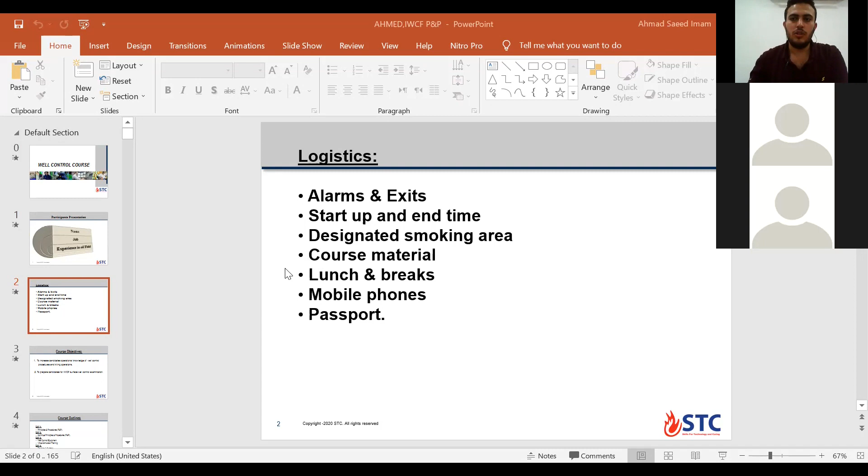After that, we're gonna talk about course objectives. We have two things. First is to increase candidates' operational knowledge of well control procedures and killing operations. During this course we're gonna face key topics and key definitions.

So we're gonna talk about the kick type, and blowout, if we didn't control and manage the situation. So we're gonna face something called a blowout. Then the type of barrier, something to prevent the kick and the influx from reaching the surface and entering the well. So we're gonna talk about barriers and barrier classification, how to pressure test these barriers, how to check that these barriers are able to prevent formation fluid from entering the well and reaching the surface.

Then we're gonna talk about key pressure definitions, like hydrostatic pressure, formation pressure, and what causes formation pressure to become abnormal. We have many causes.

Then we're gonna talk about kick warning signs. How can you detect a kick? We have some signs - if you find any of them, it's a warning sign that you have a kick. Then after that, we're gonna talk about pump pressure and its relation with mud weight change and its relation with pump speed change.

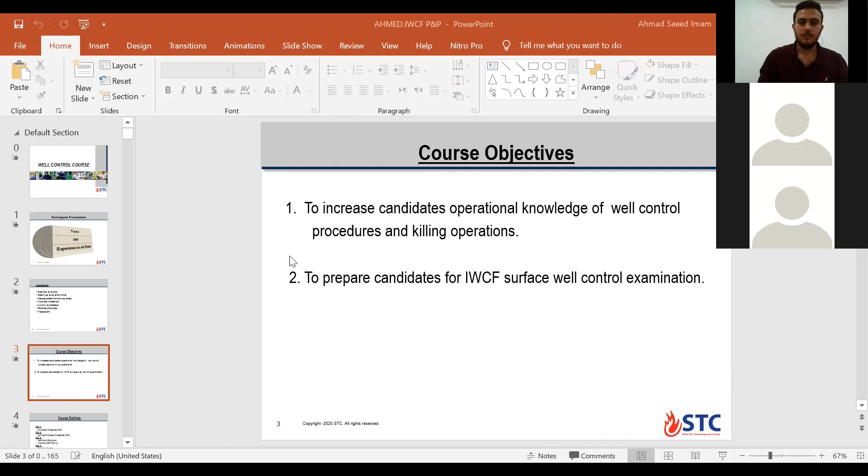So let's have a look on our course. It will be divided into 4 days, and the 5th day will be your final exam.

At day 1, we're gonna talk about principle and procedures. Day 2, we're gonna continue principle and procedure also. Day 3, we're gonna talk about well control equipment, and we have something called simulator training. This simulator training will be virtual. We gonna have a kick inside the well, so some influx just enters the well and we need to circulate it out of the well, killing our well by driller's method first circulation, for example.

So we're gonna have training for this situation, how to deal with kick situation. Then at day 4, we have a revision and some quizzes. We solve with you some exercises, and will be our virtual simulator exam on the 4th day. Then day number 5, you will have your final exam.

So to pass this course and to pass the exam of IWCF level 3, level 4, you need to get minimum score 70% for both simulator and IWCF exam, well control and equipment.

So a quick note about the exam. The exam will be 2 parts, well control and equipment part. Well control will be 64 questions, so you need to get minimum score 70% for this part. Then you have the equipment part, it will be 46 questions, and you need to get the same score, minimum 70%, to pass both of these 2 modules.

So in this situation, we have a barrier. Our hydrostatic barrier has failed and formation fluids just enter the well. As long as these fluids are still inside the well and haven't reached the surface, it is called a kick. But once our hydrostatic pressure cannot keep them inside the well and we didn't take the correct action to control the situation, formation fluid will manage to reach the surface, causing something called a blowout.

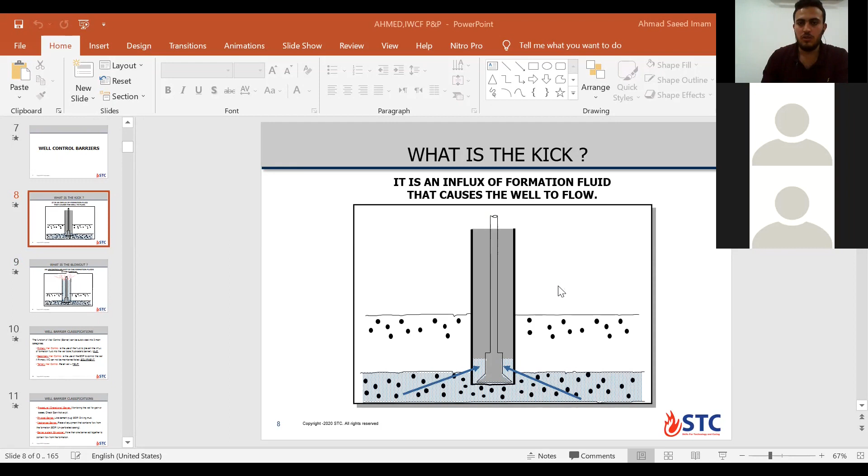So what is the definition of kick and blowout? A kick is an influx of formation fluid that causes the well to flow. But once these formation fluids reach the surface, we have something called a blowout, an uncontrolled exit of formation fluids at the surface.

Let's have a quick note about kick types. Kick fluids may be oil, may be gas, also may be water, or a combination of oil and gas. The worst case will be gas, since this is the most dangerous case because gas is able to expand and migrate, which will change the pressure of the whole system.

To prevent formation fluids from entering the well and from reaching the surface, we have something called a barrier. Let's look at the barrier, well barrier classification, and the function of the barrier. The function of the barrier is to contain formation fluids and prevent them from entering the well and reaching the surface. This is the object of the barrier.

We have three types of barrier. The first type is called primary well control. It is the use of the hydrostatic pressure of the mud to prevent formation fluids from entering the well, so it's called the primary well control barrier. Once this primary well control barrier has failed and formation fluids manage to enter the well...

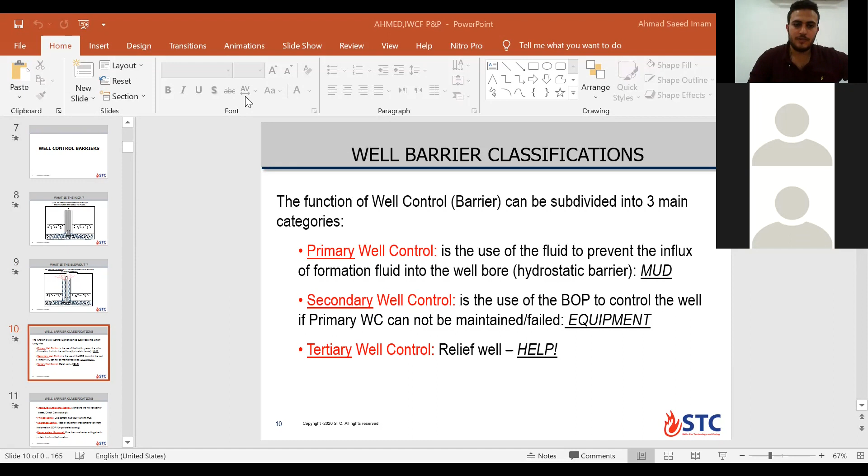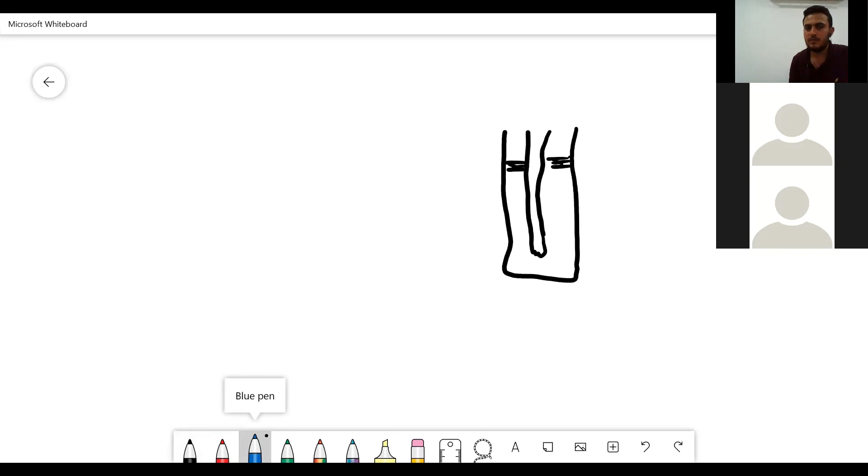For example, if we have here our well, and we have the drill string, so we shut in the well on a kick. The well is filled with mud, but this mud's hydrostatic pressure cannot maintain or overcome the formation pressure. So formation fluid just enters the well and manages to overcome the hydrostatic pressure, then manages to overcome the BOP and reach the surface, causing something called a blowout.

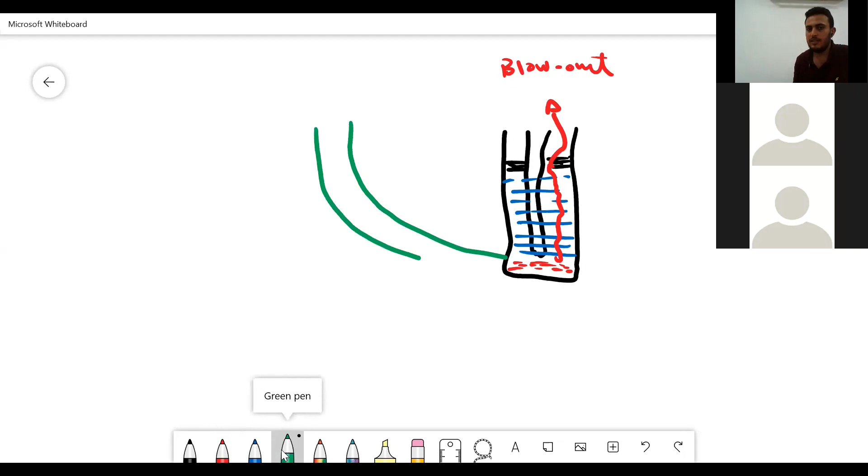In this situation, we need to drill another well in a nearer place, and make a direction into the kicking zone, then start pumping heavy, special material into the kicking zone to keep plugging it and prevent more kicking and more formation fluid from entering the well and reaching the surface. This well is called the relief well. This is our tertiary well control barrier.

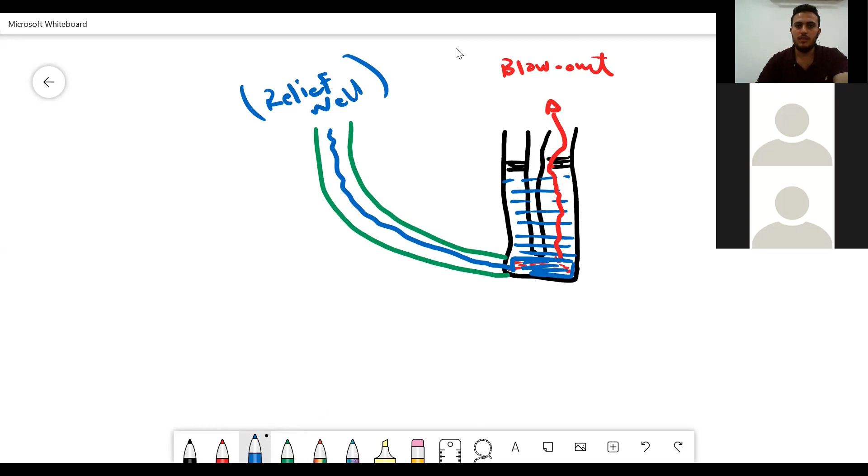Back again to our presentation. Here we have another classification for our barrier: procedural or operational barrier. What is the operational barrier? During normal operation, when you are monitoring the well with your eyes for any gain or loss, this is called operational barrier. You need to check the gain and the active pit for any gain or loss by your eyes.

Then we have something called physical barrier, anything you can see with your eyes and touch, like a cement plug, the BOP, or the drilling mud. Then we have mechanical barrier. Mechanical barrier is a piece of equipment that contains the flow from the formation, like unperforated casing. Once it is cemented against the formation, no formation fluids will be able to enter the well.

Then we have barrier system and barrier envelope: more than one barrier acting together in place to contain fluid and contain the flow from the formation. In normal drilling operation, we have a barrier system with two barriers. The first, primary barrier, will be our hydrostatic pressure of the mud, and the secondary one will be our equipment, our BOP stack. This is for barrier system and envelope.

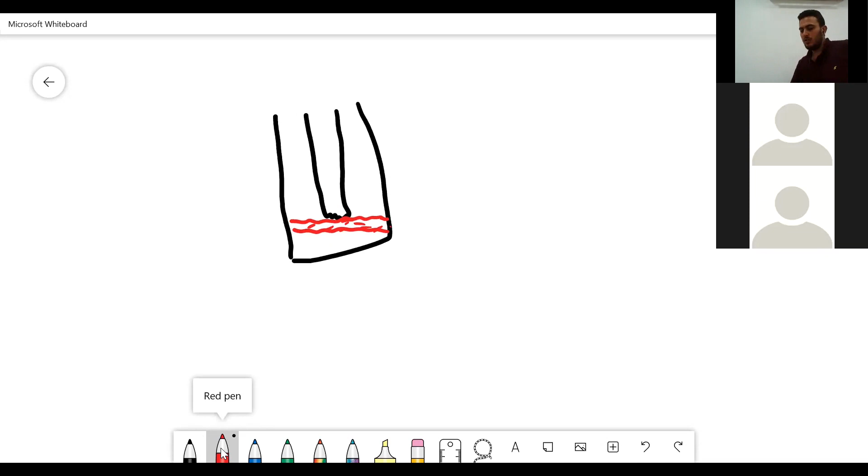And we need to test this cement plug. So we have two types of pressure test for this cement plug: positive pressure test and negative pressure test.

When taking this cement plug as individual here, so this is the cement plug. We have two pressures applying on the test plug: pressure from above, from the surface side, and pressure from below, from the formation side. So this is pressure from surface side, and this is pressure from formation side.

For positive pressure test, you will apply pressure from surface side more than the pressure from formation side, and wait some time, from 5 to 10 minutes, to check the barrier is not leaking. Your pressure is stable, no drop in the pressure reading.

Then for negative pressure test, we have the same thing. We have here the cement plug individual and separated. Also we have two pressures affecting this cement plug: pressure from above, pressure from surface side, and pressure from below, pressure of formation side.

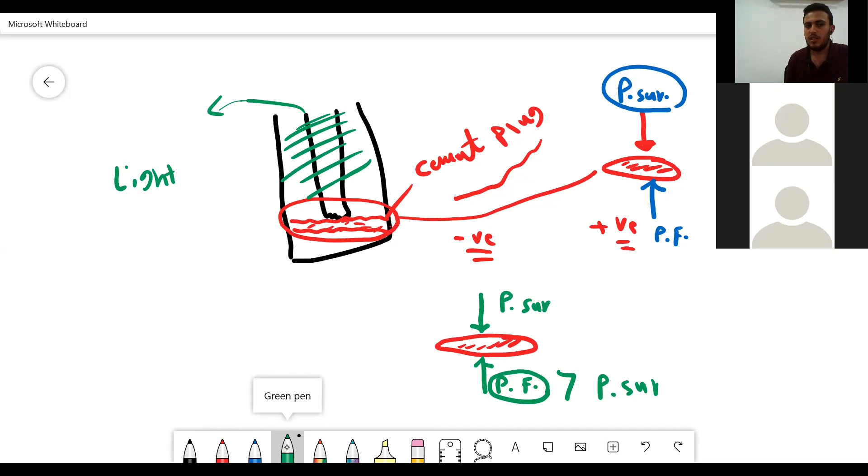For negative pressure test, you will make the pressure from formation side greater than the pressure from surface side. We can make this situation by making displacement for the fluid inside the well with lighter mud, so we're going to displace the heavy mud by lighter mud. This decreases the hydrostatic pressure, causing an underbalance situation, allowing the formation pressure side to be greater than the pressure from surface side. So these are the two types of pressure tests: positive pressure test and negative pressure test.

So what is the recommended test, positive or negative, guys? Positive pressure test is recommended or negative pressure test? I think the negative one is recommended.

Yes, the negative pressure test is recommended because it is in the direction of the flow. So here, this is the formation pressure. As long as your cement block will be able to withstand and overcome the pressure from the formation side, it will be more stable when set in the well, preventing formation fluids from entering the well.

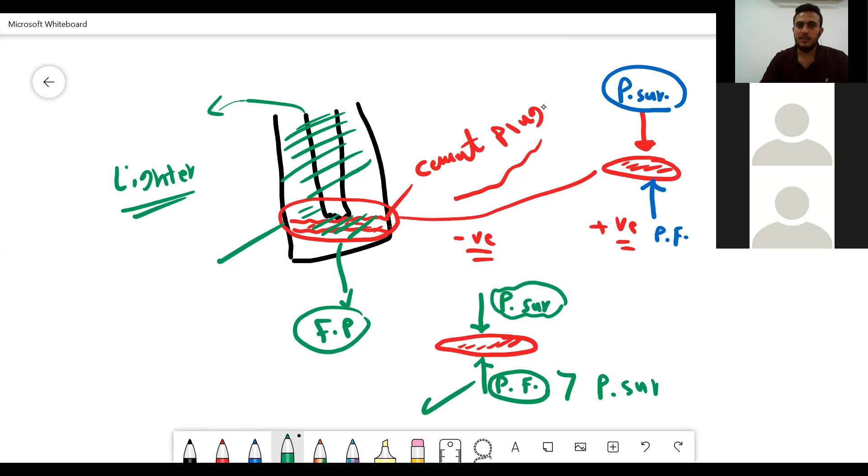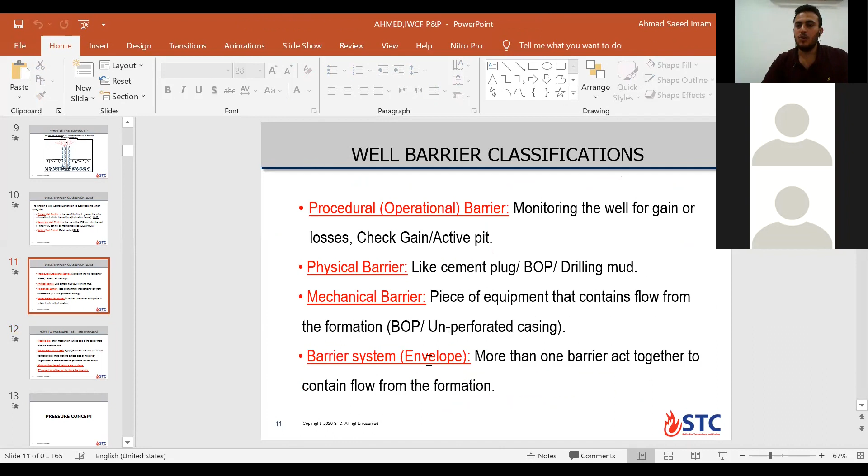So back again to our presentation here, negative pressure test is recommended to perform the test of the barrier. And as we mentioned, we need minimum two barriers to test, in place. This is called the barrier system or barrier envelope, two barriers acting together in place.

Also, according to the API recommendation, we need to make pressure test for the most important 2 points, the cement block and liner lap, to check their integrity. Why these 2 points specifically? Let's go back again to the whiteboard.

Here we have the 2 cases and 2 scenarios. Case number 1, when we have the drill string inside the well. Case number 2, when we have a liner.

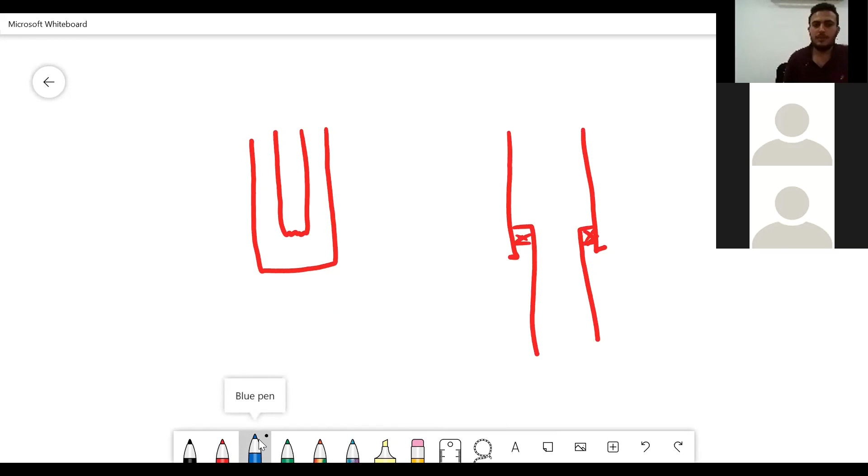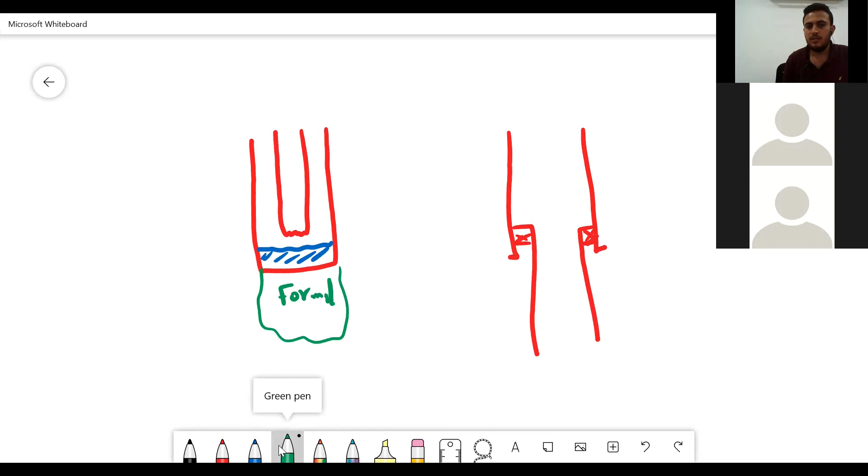So here, first case, we have cement block inside the well, and below is the formation. So here will be formation, and formation fluid. The same thing here, we have formation. So why do we need to pressure test these 2 points, the point of cement block and the point of liner lap?

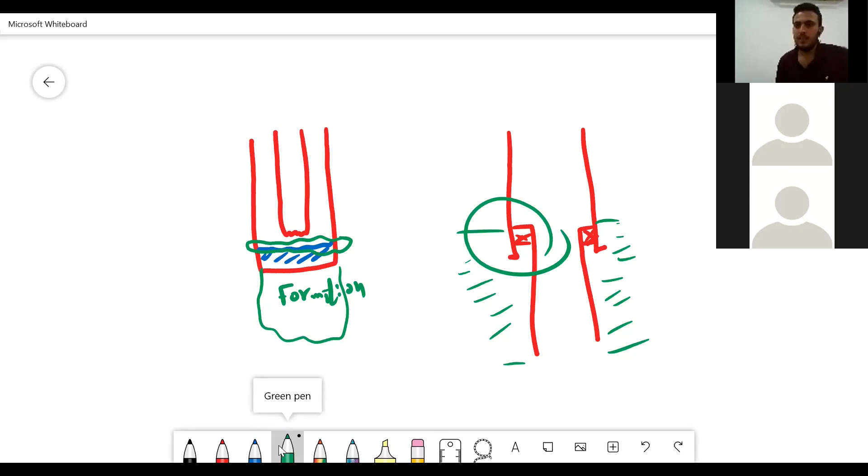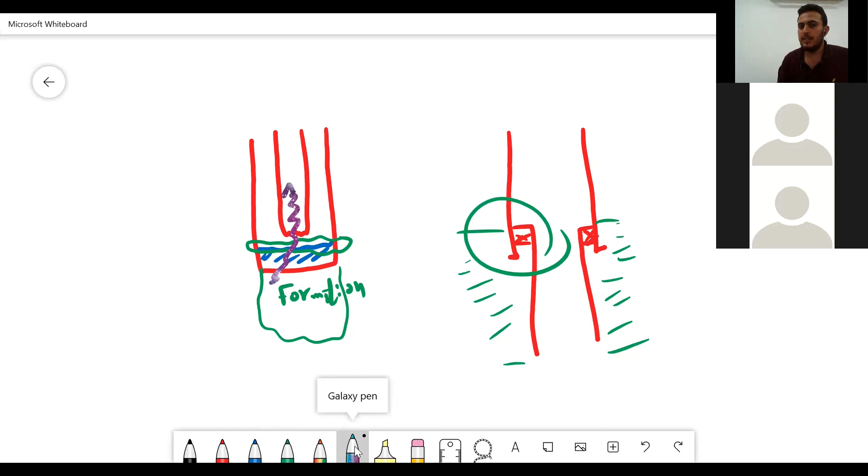Why these 2 points? Because these 2 points are points of communication, so they may allow the formation fluid to enter the well. Once the cement block has failed, formation fluids will manage to enter the well. The same thing here for liner lap: once this point is leaking, formation fluids will manage to enter the well from these 2 weak points or points of communication. So the most important 2 points we need to check their integrity are the cement block and the liner lap.

Let's go back again to the presentation. Now we're going to talk about pressure concepts. We have two main pressures we need to talk about: hydrostatic pressure and formation pressure.

Starting with hydrostatic pressure: hydro refers to fluid, and static refers to fluid at rest. So how do we calculate hydrostatic pressure? Hydrostatic pressure equals mud weight times TVD times a constant. Here, pressure is in PSI (pound per square inch), mud weight in ppg (pound per gallon), and depth in feet. So how do we convert ppg times feet into PSI?

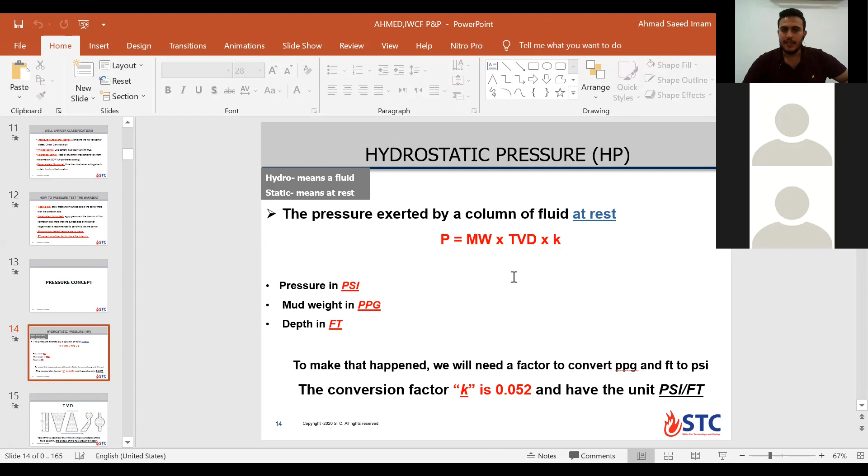By using a conversion factor. The value of this conversion factor is 0.052. We use this value to convert ppg times feet into pound per square inch. It's called the conversion factor, and it equals 0.052. In our hydrostatic pressure equation, we deal with the TVD only.

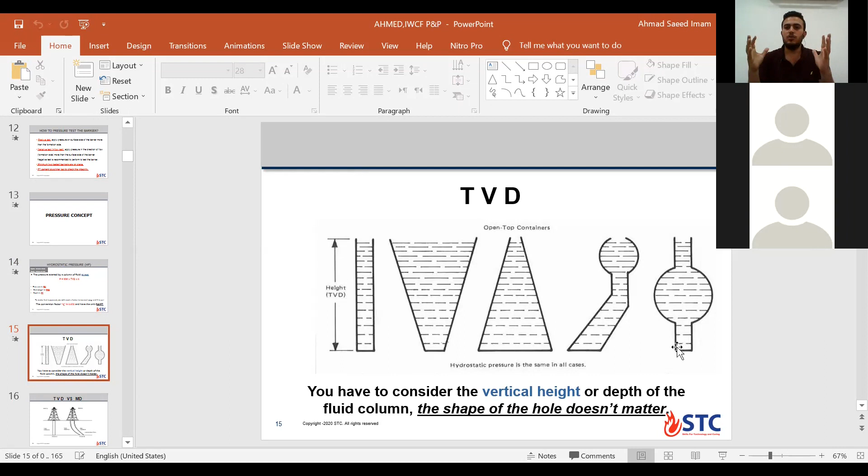So we're concerned with the TVD and not the shape of the hole. The shape of the hole does not matter. If you calculate hydrostatic pressure at the lowest part of different shaped wells, at the same true vertical depth, you'll find the hydrostatic pressure is equal for all shapes, because hydrostatic pressure only depends on TVD, not volume, not measured depth.

Now it's time to talk about something called hydrostatic pressure gradient. If we have hydrostatic pressure for this shape equal to 6,000 psi, for example, and we have its length or TVD equal to, let's share the whiteboard for this.

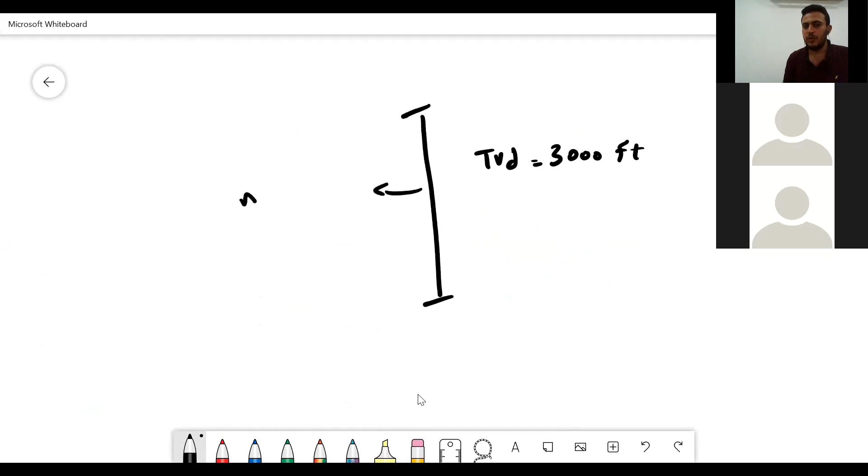So if we have a specific well with TVD equal to 3,000 feet, to calculate its pressure we need to know the mud weight inside the well. Say 9 ppg. So this is our well. Our hydrostatic pressure will equal 0.052 times 3,000 feet times 9 ppg. Let's calculate it: 0.052 times 3,000 times 9.

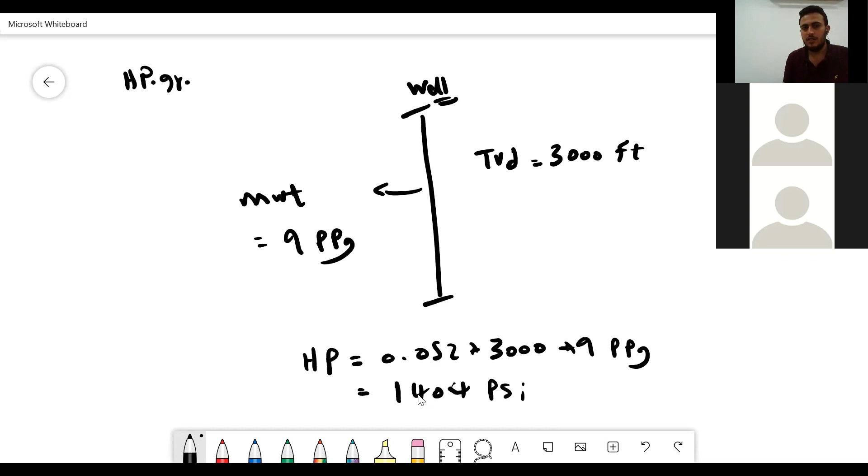It will equal 1404 psi. This is the hydrostatic pressure. So what if I ask you to calculate the hydrostatic pressure gradient? We divide it by the true vertical depth, right? We need to take the hydrostatic pressure over the TVD.

So it will equal 0.052 times the mud weight. This is the equation to calculate the hydrostatic pressure gradient from hydrostatic pressure over TVD. So the rest of the equation equals 0.052 times the mud weight.

So to calculate the hydrostatic pressure gradient for this real case, it will equal 1404 over TVD of 3,000. Let's calculate: 1404 over 3,000 equals 0.468 psi per foot.

We have another way to calculate the hydrostatic pressure gradient, just by multiplying 0.052 times 9 — these two factors, the conversion factor and the mud weight. If we multiply 0.052 times 9, we get the same value, 0.468 psi per foot. This is for hydrostatic pressure gradient.

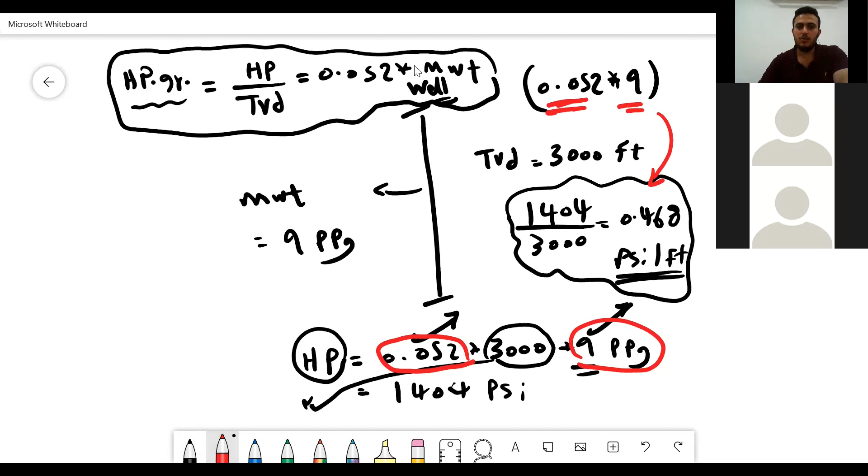Back again to our presentation, but here we have some questions for you. Please check. Here, he gave you 10 ppg and asked to calculate the pressure gradient. Could you please calculate this?

If we have mud weight of 10 ppg, times 0.052, okay right. Example number 2: if we have a pressure gradient at 8,500 feet of 0.65 psi per foot, what is the mud weight in this situation? We have TVD and we have the pressure gradient, so it will equal...

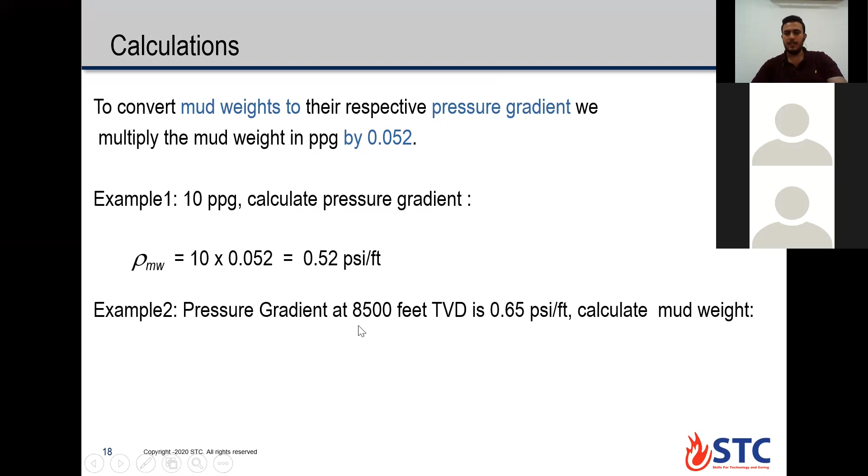Excuse me, I got interrupted. Can I get the question again? Here we have TVD as 8,500 feet, and we have our hydrostatic pressure gradient. To calculate the mud weight in this situation, we just take the pressure gradient over 0.052. So it will be 12.5. Did you calculate this correctly? Yes, okay.

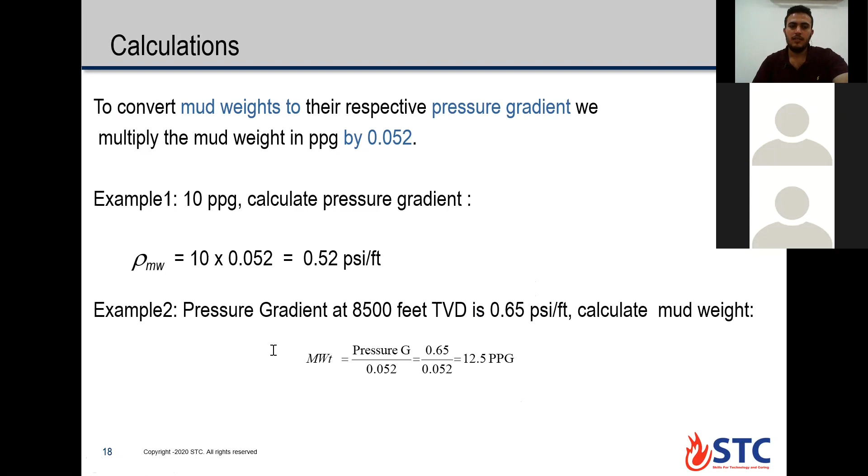Now we're going to talk about formation pressure. What is the formation pressure, guys? Formation pressure is the pressure of the fluids inside the formation pore space. So if I ask about the definition of formation pressure, it is the pressure of the fluids within the pore space of the formation.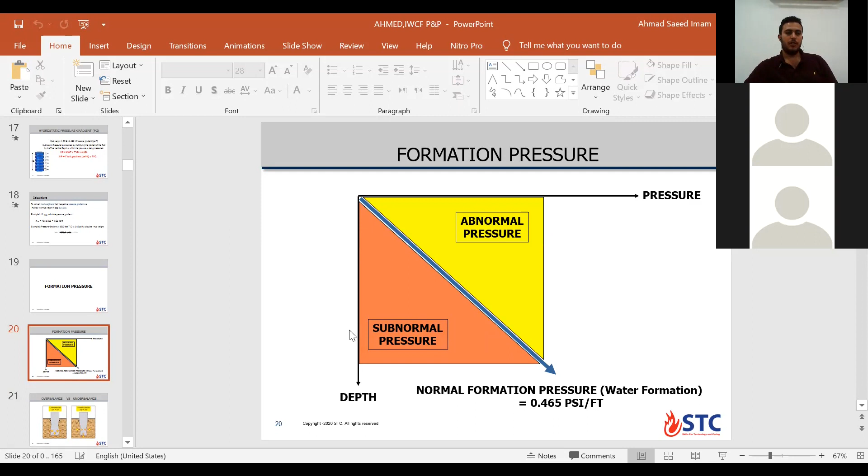We have many more causes for a formation to be abnormally pressured. As mentioned before, the difference between overbalance and underbalance: when the formation pressure gets larger than hydrostatic pressure, we are in an underbalance situation and formation fluids will enter the well, causing a kick. If we don't control the situation, we'll have a blowout.

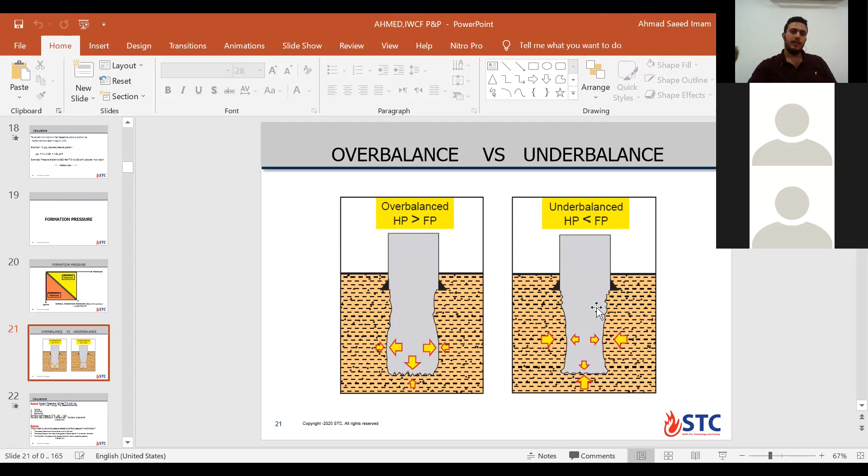So let's look at this question before calculations. We have formation pressure at 1,200 feet equal to 601 psi, and mud weight equal to 10.5. Will this pressure be normal, abnormal, or subnormal?

I guess it will be abnormal formation pressure. We need first to calculate the formation pressure gradient. So it will be 0.5008 psi. This value is greater than the normal datum of 0.465, so here our formation is abnormally pressured.

So what about this question: what is meant by abnormal pressure related to the fluid pressure in the formation? Could you check this question? I think it's C. When formation fluid pressure exceeds formation water hydrostatic pressure, in this situation we can say we have an abnormally pressured formation.

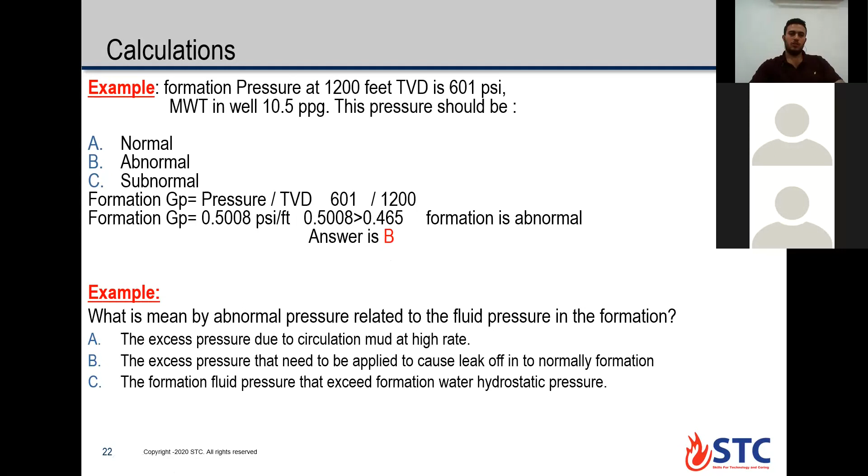Now we're gonna talk about the causes that cause the formation to be abnormally pressured. Number one, we have something called undercompacted shale.

During the sedimentation of the formation and the compaction of the formation, we have a dewatering process. This black arrow means there is dewatering - water started to be expelled out of the pore space of the formation with compaction. Once we have an impermeable layer like shale formation, this shale will prevent the pore space filled with water from more dewatering, causing trapped pressure in this area.

Here, formation pressure will be abnormal because the sealed area of shale prevented more dewatering, prevented the formation from expelling out the water from it. So here will be an abnormally pressured formation.

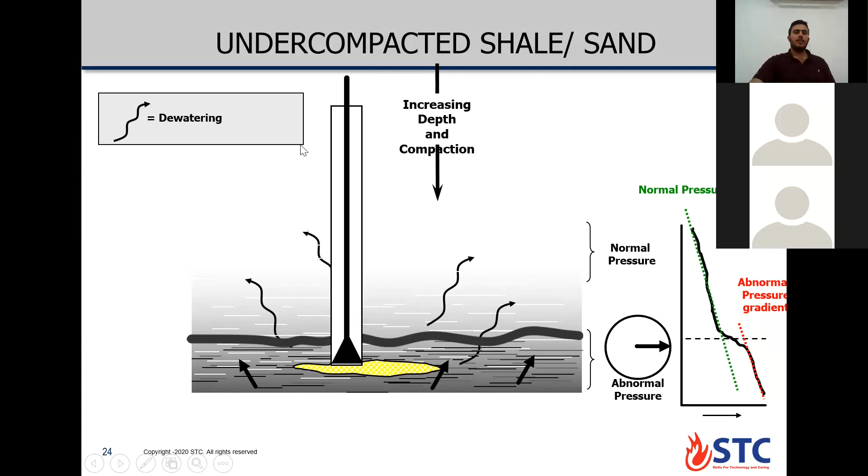So if we plan to drill a well in this area, we need to take into consideration the cause of abnormal pressure. We can determine it by seismic, geological, and reservoir engineering. If you look at the pressure trend, once we face this area we will find a shift in the trend of the pressure, referring to the abnormally pressured formation. This is the most common cause of abnormally pressured formation.

Cause number 2 is called gas cap rock. What is meant by gas cap rock? Here we have a sealed formation like shale, an impermeable formation, and below it there is gas. Why gas in this area? Gas is lower density, so it tends to move upward. Once it faces the impermeable formation, it cannot go through it and keeps moving upward again and again, so in this area there is trapped pressure causing an abnormally pressured formation.

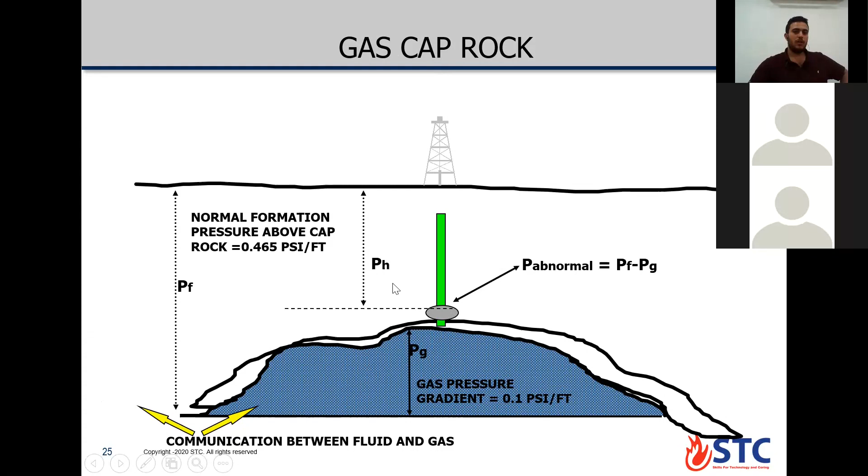So how to calculate the pressure at the top of this area? This question may come in the exam, asking you to calculate the abnormal pressure here. So let's have a real example on the whiteboard.

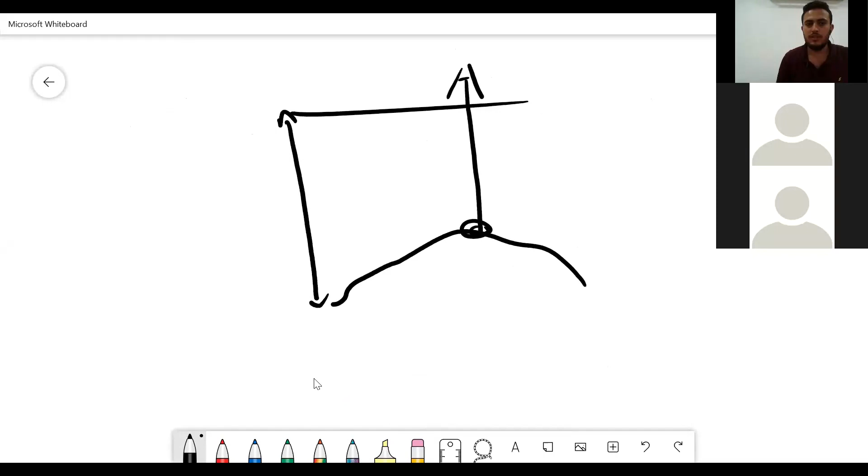If we have here a gas cap, this is the surface side, and we need to drill a well in this area. We need to calculate the pressure at the top of the gas cap. Here is normal formation, we have TVD for example 3,000 feet. So here at the middle we have 1,500 feet, and we need to calculate the formation pressure.

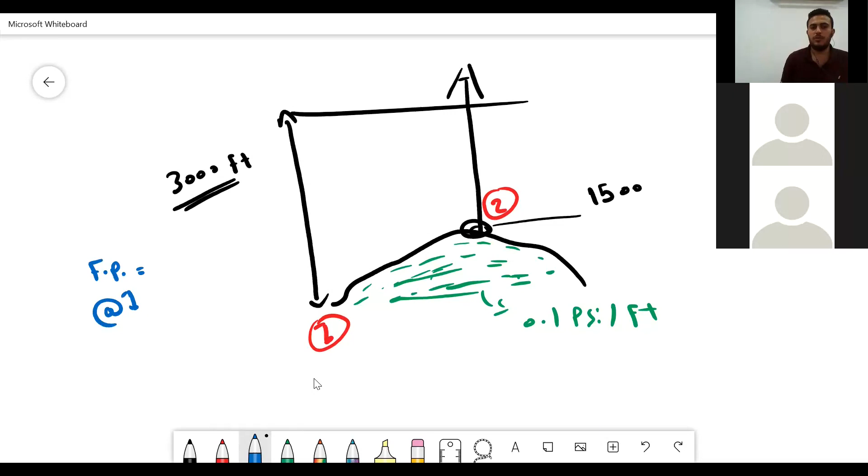For case 1, let's change color. Case number 1 is to calculate formation pressure here, and case number 2 is to calculate formation pressure at the top. We have gas below the gas cap rock with hydrostatic pressure gradient 0.1 psi per feet. So first scenario: to calculate pressure at point 1, formation pressure at point 1 will equal the normal formation pressure gradient, 0.465 psi per feet, times 3,000.

So let's calculate: 0.465 times 3,000, it will be 1395 psi. So if we need to calculate pressure here at the gas cap, we need first to put its equation: P abnormal will equal formation pressure minus the hydrostatic pressure of the gas.

So here it will equal the 1395 we just calculated, minus the hydrostatic pressure of the gas. To calculate hydrostatic pressure of the gas, we need to take its TVD, 1,500, times 0.1, so it will equal 150.

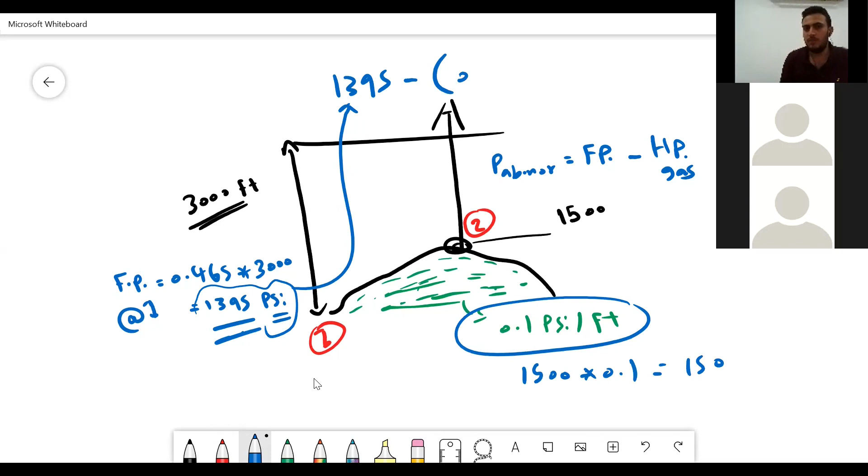So here it will be 0.1 psi per feet times 1,500. So it will equal, let's calculate with you, the same number minus 150. So it will be 1,245. Okay, this is for abnormal formation pressure.

Let's have a look if we ignore the abnormal pressure cause and calculate it as normal. So normal pressure at point 2 will equal what? It will equal 1,500 times 0.465. So let's calculate. It will be only 697.

psi. Okay, so let's imagine the difference. How much is the difference between the abnormal pressure at point 2 here, and the normal pressure here at point 2 when we calculated? So it will equal, as we mentioned, about 1,245, and here equal 697. Okay, so there is a large difference between the two values, about 500 psi.

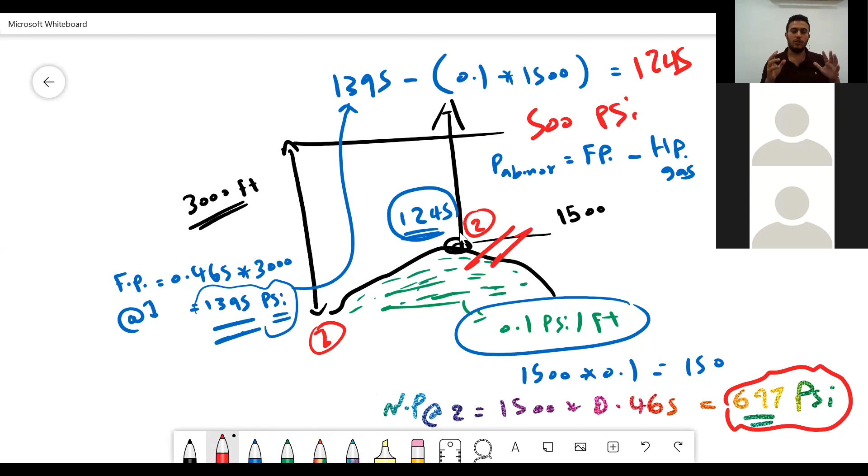So if you ignore the concept of abnormally pressured formation and you're gonna drill and plan to drill a well in this area, of the gas cap, you need to take into consideration the gas cap reason. If you ignore it, for sure you will have a kick and an underbalanced situation. Okay, clear till now, guys? Yes. Okay.

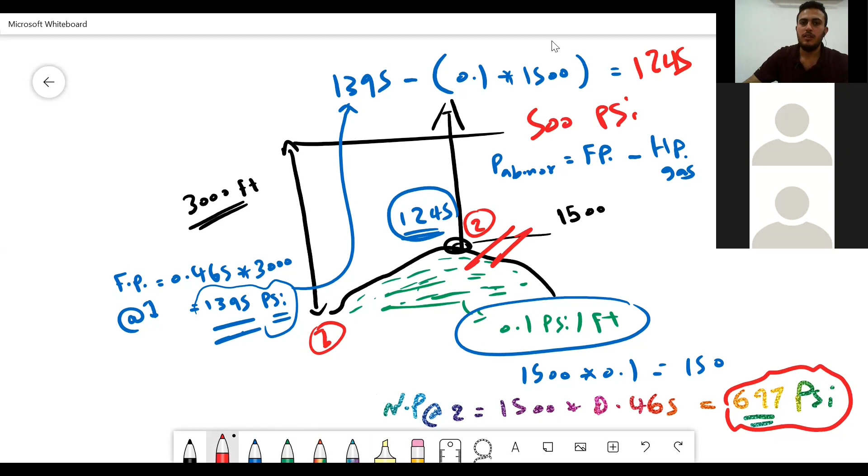So here, as we mentioned, to calculate the pressure at this point to be abnormal, we need to take the pressure of the formation, the normal formation pressure, minus the pressure of the gas below the cap rock. So pressure here will equal 0.1 psi per feet times the TVD at this area.

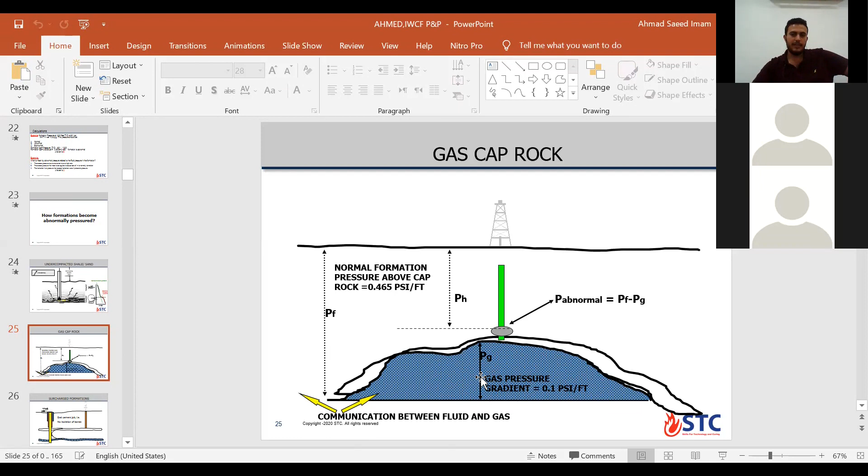Here, cause number 4, reason number 4: fault. This fault is related to a geological issue - tectonic movements or anything like this. Once we have a fault, the formation is divided into two parts, one upward and one downward.

So here, the formation at downward has its same pressure, for example, 3,000 psi. Once you move the upward part to a shallower depth, you move with your pressure. So the yellow part will move into a shallower depth with its pressure. So if we have here 3,000 psi, we'll have the same 3,000 psi at shallower depth. So if you plan to drill a well here in this area, it will be normal formation gradient.

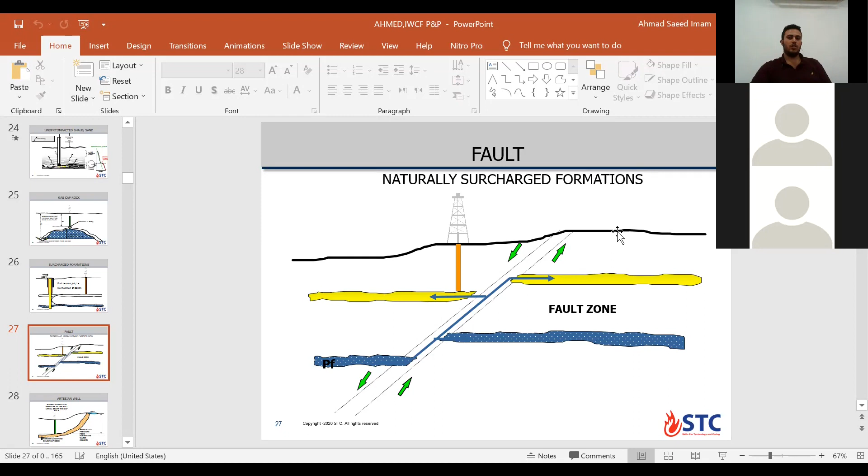But if you're gonna drill a well here in this area, you will face higher formation pressure at shallower depths. So you need to always take into consideration the causes of abnormally pressured formation.

Cause number 5, the last one with us, is called artesian well. So what is the artesian well? It's to drill your well and make your well here at shallower or lower depths than the source of water. So once you make your rig here at a lower depth than the source of water, always the source of water is charging your formation. So if you're gonna calculate your formation pressure, you will take the shorter TVD.

Not taking into consideration this part, you always make your value of formation pressure lower than the actual, okay? So you need to take into consideration this cause of artesian well. How to overcome this situation? From the beginning, you need to make your rig site in an upper position over the source of water, if possible. And if it is not possible, you need to take into consideration this part called artesian well.

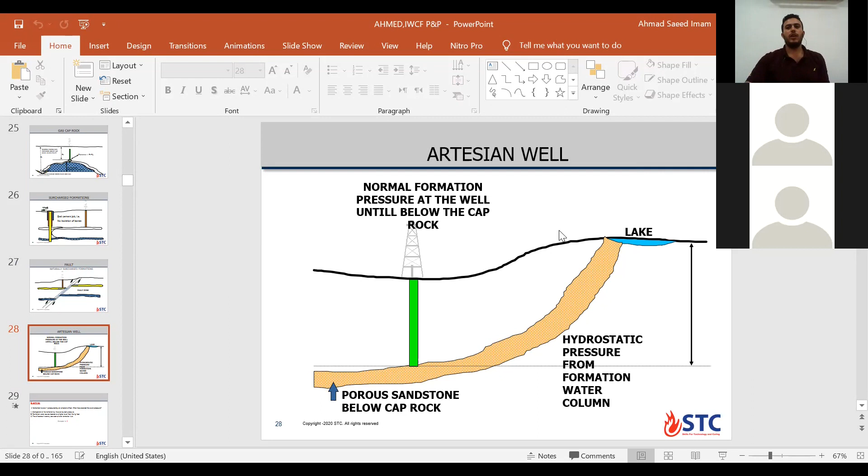Now we're gonna talk about formation characteristics, or reservoir characteristics. We have 2 main and important characteristics that feature our formation. Number 1 is called porosity, number 2 is called permeability.

So porosity here is the percent of the void space within the rock, and it gives you an indication about the rock capacity. So if we have here 2 rocks like shale and sand at a given depth, for example 10,000 feet, you will find the porosity of the shale around 8%, but the porosity of the sand at the same depth will be about 20%. This is because with compaction, shale is more compacted, so lower pore space, so lower porosity, okay guys?

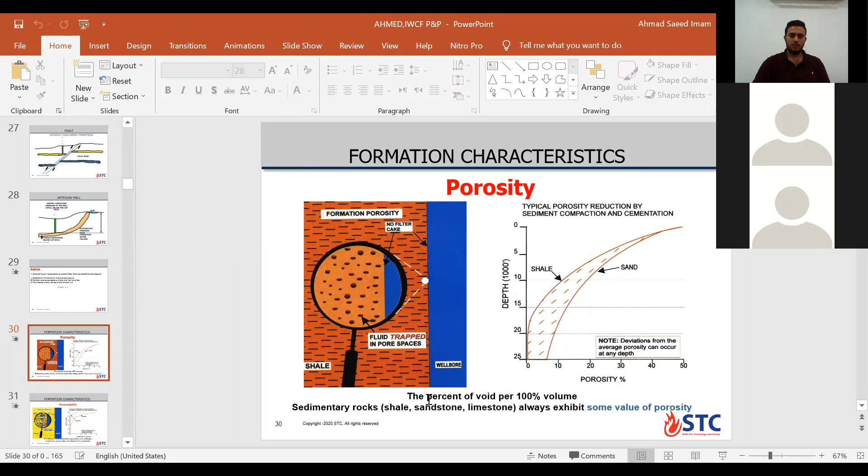This is for porosity. And permeability is the ability of the rock to transmit the fluid through it. We have many types of permeability, effective permeability and absolute permeability, but it's not related to our course. You just need to know that permeability is the ability of the rock to transmit the fluid through it.

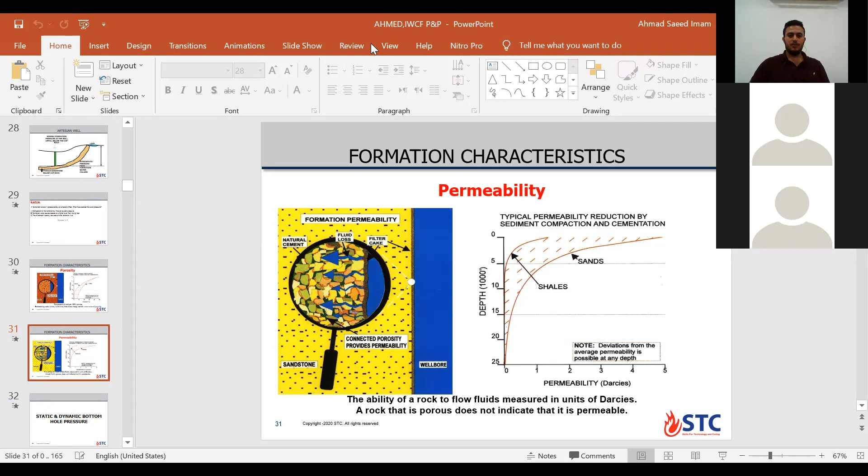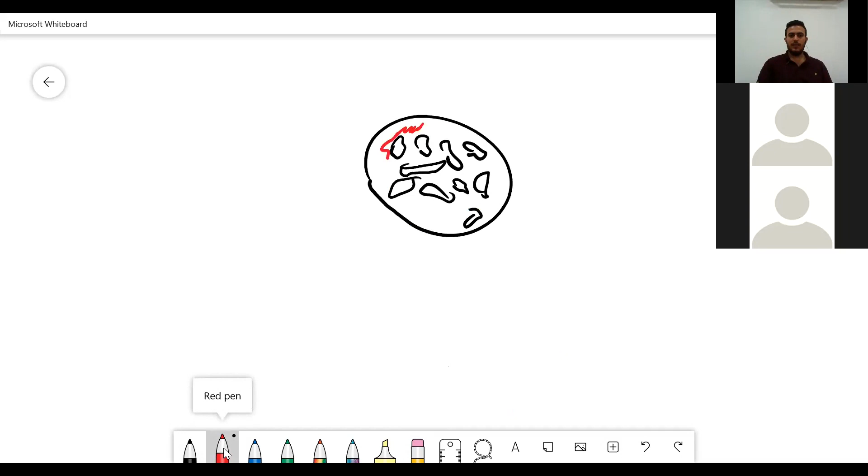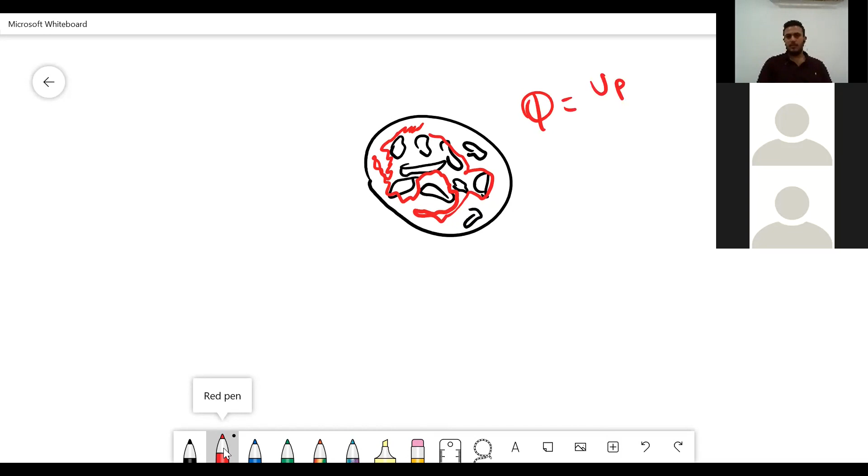So let's look at the difference between porosity and permeability. Here is our rock. We have some grains, some solids, forming the rock, and the spaces between the solids are called the porosity. These spaces can be filled with fluids, whether oil, gas, or water. It's referred to by this symbol called phi, equal to V pore space over V bulk. This is called porosity.

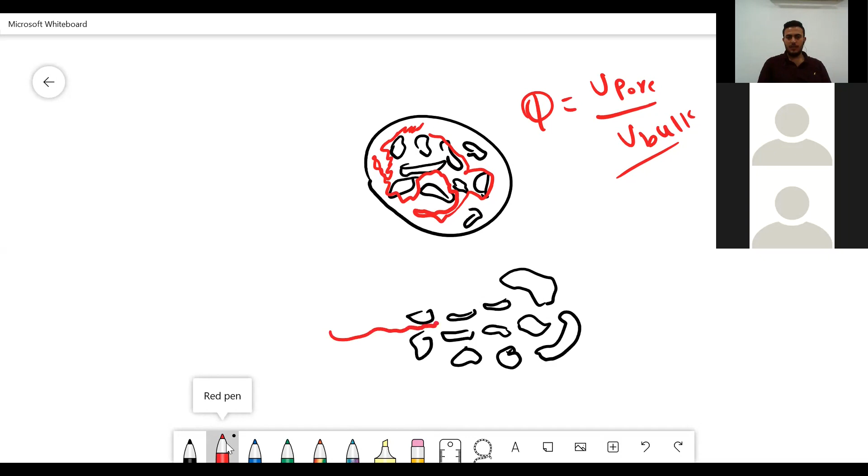What about permeability? If you have grains like this, we need our fluid to pass through the rock to enter the well. So formation fluid needs to pass through these permeable spaces or permeable formation to enter the well. This is called permeability, the ability of the rock to transmit the fluid. Once there is blockage, fluids cannot move. Only permeability happens in interconnected pores, as the fluids find a way, a path to move through it. This is the difference, and we refer to it by K, called permeability. So we have porosity and we have permeability - these are the two main features of the formation characteristics.

Back again to our PowerPoint. Now we're going to talk about static and dynamic bottom hole pressures.

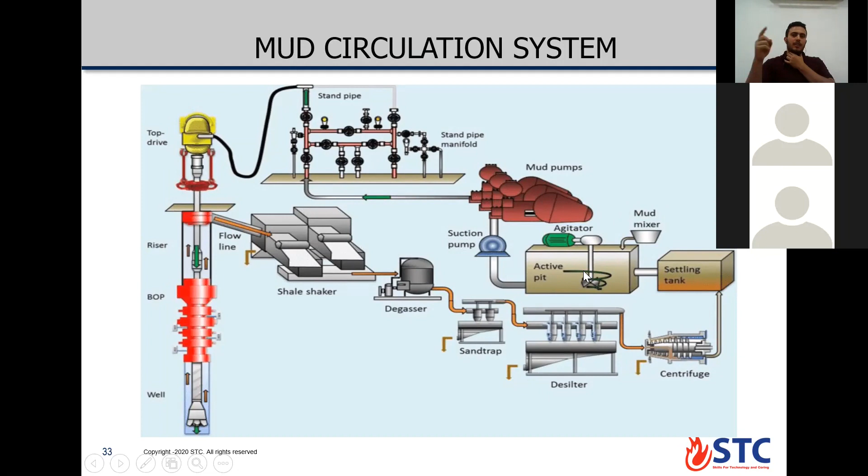If you look at this figure, you're going to see the complete cycle of the fluid. First, we take the mud from the active pit via the suction pump, then to the mud pumps, then to the standpipe manifold. The fluid goes to the standpipe, then to the swivel top drive system, and downward through the drill string until it's out of the bit, then back from the annulus to the flow line. There is a bend in the flow line, so the fluid at the surface at this point has 0 psi and only moves with gravitational effect. Then to the shaker area, then degasser, desilter, desander, then centrifuge again, and settling tank, then mud mixer, then back to the active pit again, completing the cycle.

Now we have our mud system, mud pressure losses. We have static bottom hole pressure - static here means no pump is running, the pump is turned off. To calculate the static pressure at this point, it equals mud weight times 0.052 times TVD. So it equals the mud weight inside the well, 10 ppg, times 0.052 the constant, times the TVD, 10,000. The pressure at this point will equal 5,200 psi.

Dynamic here refers to when the pump is running. Once the pump is running, I need to ask you a question: what is the pump pressure? Do you know the definition?

Pump pressure is the pressure required to overcome all pressure losses in the system. If you look here, we have the surface line, then drill string, drill collar, then from annulus back to the surface. In the surface line we have friction, and also in the drill string and annulus we have friction. So pump pressure is the pressure required to overcome all this friction to allow your fluid to make its trip down the drill string and upward to the surface again. That's why it's called pump pressure.

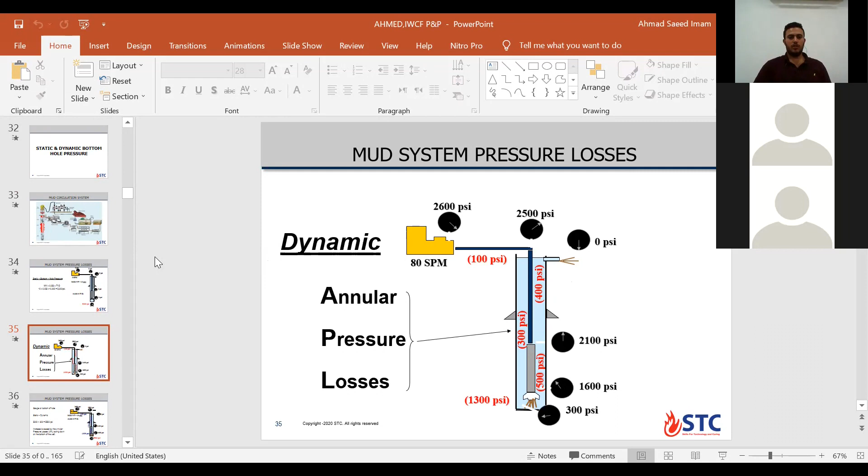To calculate the BHP, bottom hole pressure, in a dynamic situation, we need to add annular pressure loss to the static pressure. As we calculated, static hydrostatic pressure equals 5200 psi. To calculate the dynamic one, we need to add a value called APL, annular pressure loss. This affects the annular area, so the increase is caused by annular pressure loss acting down on the bottom hole. This is called dynamic pressure.

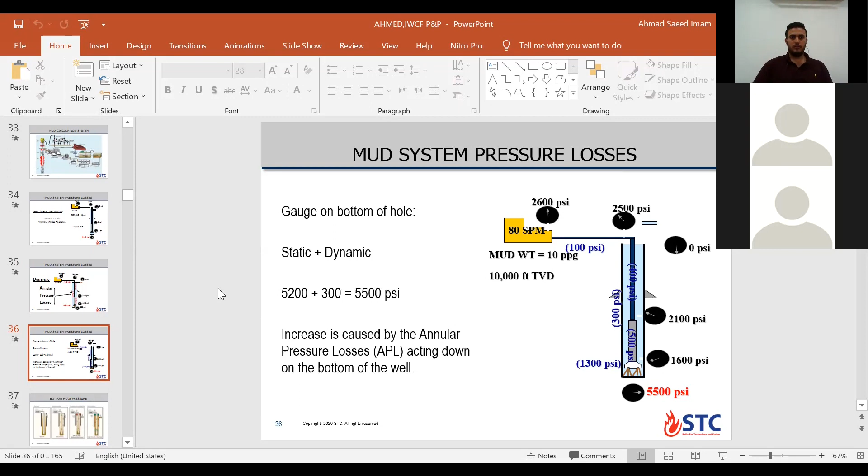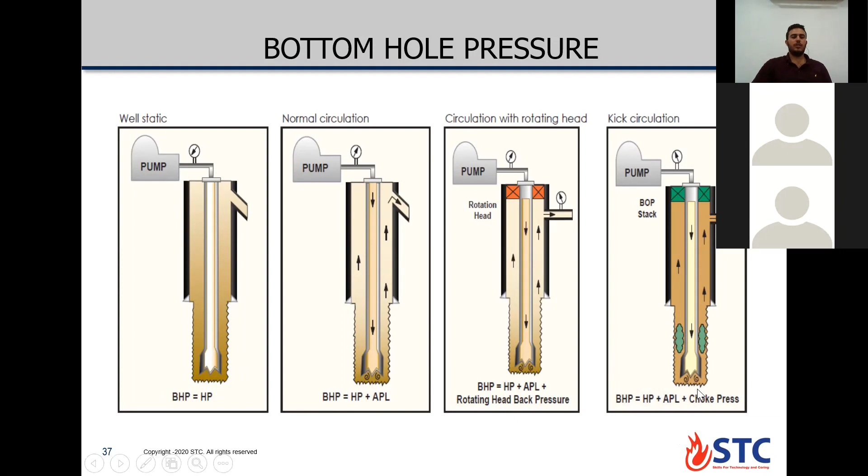Looking at bottom hole pressure in various situations: when the well is static, bottom hole pressure equals only the hydrostatic pressure. For normal circulation, during the dynamic situation, you have hydrostatic pressure plus APL, annular pressure loss. Once you're drilling underbalanced or in well intervention jobs, you use a rotating head, so bottom hole pressure equals hydrostatic pressure plus annular pressure loss plus rotating head back pressure. Once you deal with a kick situation, you need to circulate the kick out using a choke, which creates back pressure. So bottom hole pressure in this situation equals hydrostatic pressure plus annular pressure loss due to circulation plus choke pressure. This covers different situations for calculating bottom hole pressure.

We need to differentiate between static and dynamic situations. In a static situation, bottom hole pressure equals only the hydrostatic pressure: 0.052 times TVD times mud weight. Then compare hydrostatic pressure with formation pressure. If hydrostatic pressure is lower than formation pressure, you will have a kick due to being in an underbalanced situation. But once you're drilling with higher hydrostatic pressure due to the effect of annular pressure loss, you are always in an overbalance situation and no formation fluids will enter the well.

So the question here is for you guys: what is the minimum overbalance pressure?

I think it must be just above 5,300 psi. Yeah, the minimum overbalance pressure according to API recommendations and well control operations is about 200 psi, or equivalent to 0.5 ppg. So the minimum is to keep your pressure greater than formation pressure by 200 psi.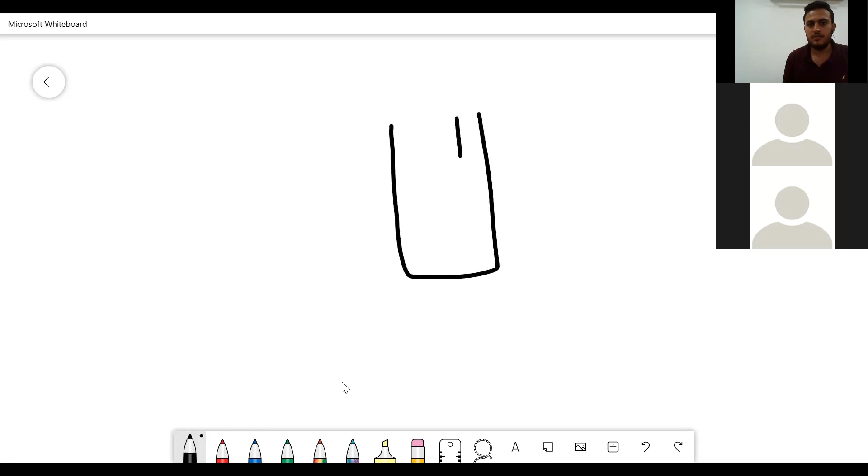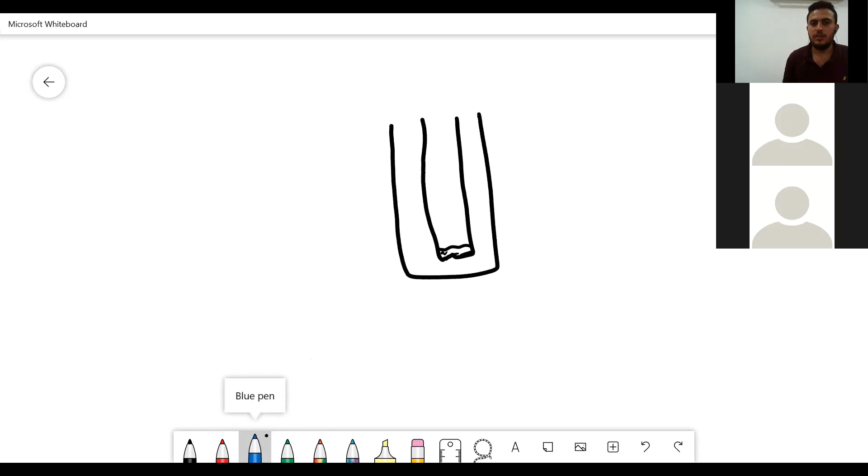Let's share a whiteboard example. If we have our well, this is the drill string inside the well. The well is filled with drilling fluid, say 9 ppg mud weight. And we have the effect of the APL, annular pressure loss, equal to say 300 psi.

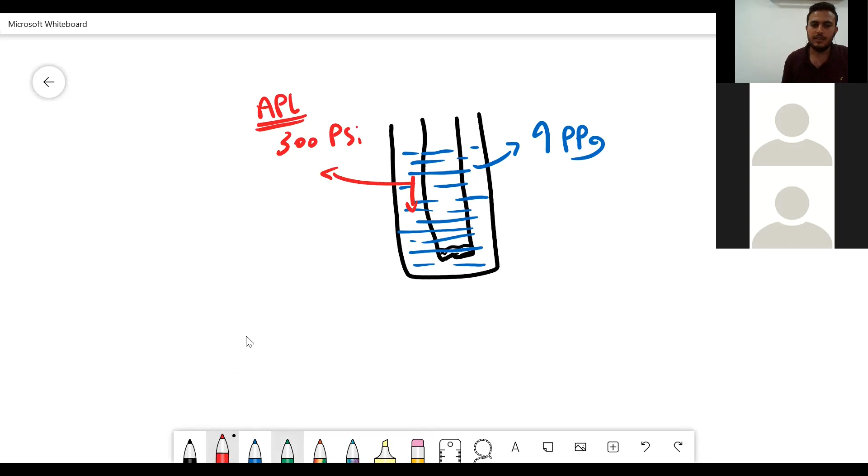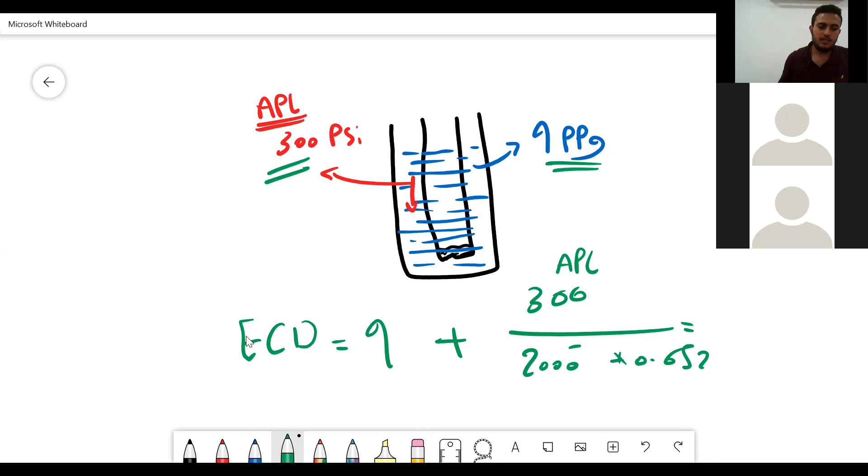We need to calculate the ECD, the equivalent circulating density. ECD will equal original mud weight of 9 ppg plus the APL pressure of 300 psi, over TVD, say 2000 feet, times 0.052. Let's calculate: 300 over 2000 times 0.052 equals 2.88. So 9 ppg plus 2.88 equals 11.88 ppg. This is the ECD.

We have something called rounding for mud weight and pressures. For mud weight, we need to make it only have one decimal part. So for example, say we have 15.1, not 11 or 21 or 31 decimal digits. So here the ECD will be rounded down to 11.8 ppg. This is for ECD.

Back to our presentation. We need to talk about the effects on pump pressure, its relation with mud weight change, and its relation with pump speed change. Let's look at the first situation.

When we have a mud weight change, what do you expect for pump pressure? Will it increase, decrease, or stay the same once you increase your mud weight, for example, from 10 ppg to 11 ppg? Does pump pressure increase, decrease, or stay the same?

Berkay, pump pressure increase, decrease, or stays the same? I think it will decrease. It will be increased. Once you increase mud weight, you need more pump pressure to control the situation.

So it is good drilling practice to calculate the new circulating pressure before changing the mud weight. You need to change your mud weight from 10 ppg to 11 ppg, and first calculate your new pump pressure. The new pump pressure will equal the old pump pressure times mud weight new over mud weight old.

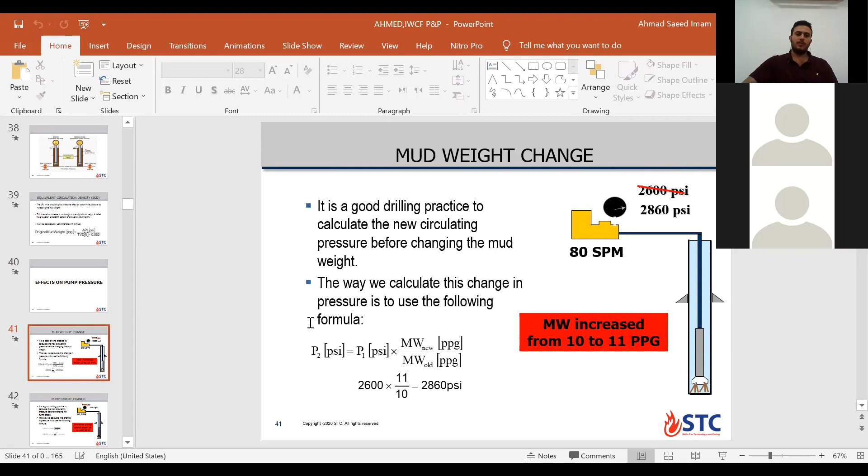Let's have a practice. Once we have changed our mud weight from 10 to 11, and we have old pump pressure equal to 2,600, pump pressure 2 will equal 2,600, the old pressure, times the new mud weight over the old mud weight. So it will equal 2,860 psi. You can use it from the formula sheet also.

Here, when we change pump strokes or pump speed, once we increase pump speed, will pump pressure increase, decrease, or stay the same? Could you share, guys? It will increase. Yes, it will be increased. And you can calculate the new value of the pump pressure using this formula.

Pump pressure new will equal pump pressure old times stroke per minute, or pump speed new over pump speed old, all power 2. Okay, and don't forget all power 2. So let's have a practice.

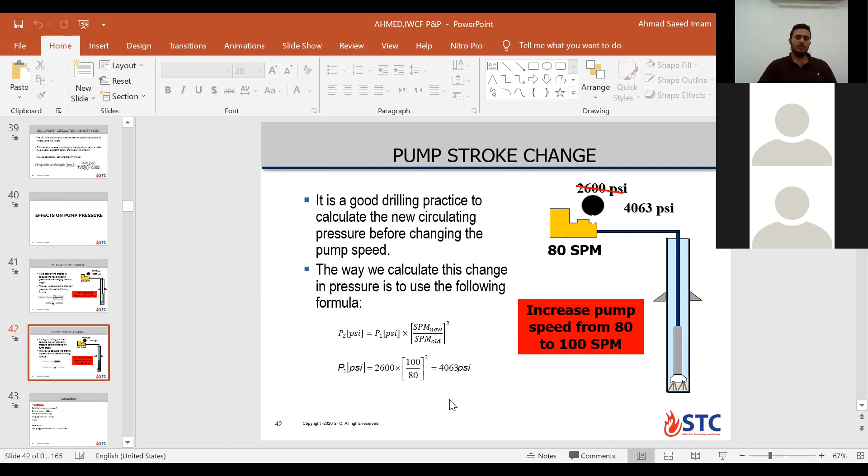If we change pump speed from 80 SPM to 100 SPM, we need to calculate the new pump pressure. Just apply the equation from the formula sheet. Pump pressure new will equal the old pump pressure 2,600 times new pump speed 100 over old pump speed 80, all power 2. So the answer will be 4,063 psi. I think there is a question for you now, so please have a practice on it.

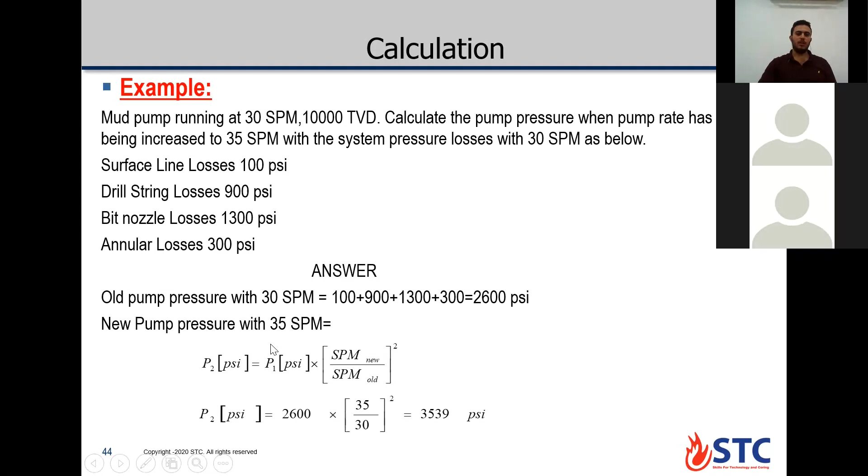Now we're gonna talk about kick occurrence. So kick occurrence here, the reasons why formation pressure exceeds hydrostatic pressure. We have two main reasons.

First reason, when pore pressure increases, it will be abnormal pressure, and we discussed this earlier when we talked about the causes for abnormal pressure formation. Number one, under-compacted shale sand, then gas cap rock, then faulted formation, surcharged formation, and artesian well. These are the 5 reasons for abnormal pressure.

Cause number 2, when your fluid column is reduced inside the well, your hydrostatic pressure reduces below the formation pressure, so you will be underbalanced and formation fluids will enter the well. So these are the causes of influx entering the well.

Number one, insufficient drilling fluid density. If you have wrong mixing for mud formations, in this situation mud weight will be lighter than needed or than actual. If you're running the centrifuge too much, you remove more solids from the mud, so your mud will be lighter. In this situation, with insufficient drilling fluid density, your hydrostatic pressure will be reduced, and if it is below a specific value, you will be in an underbalanced situation and you may have a kick.

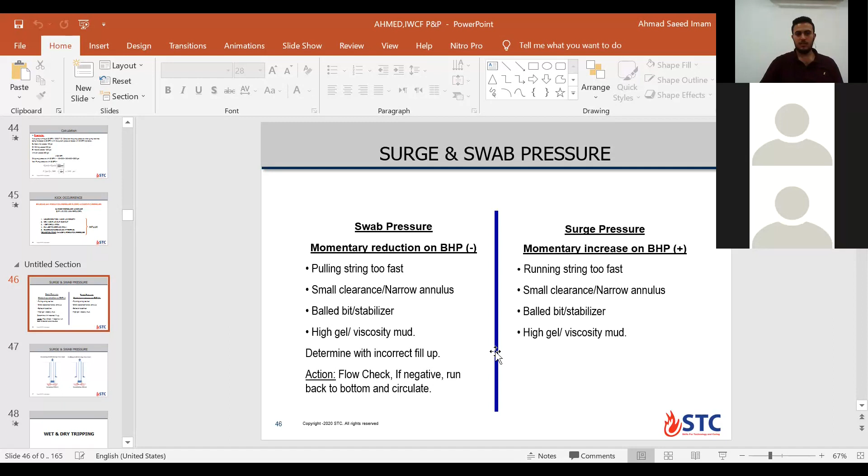Here is the difference between surge and swab pressure. While running out of the hole, the bottom hole pressure is reduced, and formation fluids will enter the well — that's swabbing. Surging happens when running in the hole, where we may add pressure, causing fractures. Some of our drilling mud may enter the pore space, causing the level to drop to a specific value, then formation fluids will enter the well, causing a kick.

Okay, guys? Okay. Okay, clear till now?